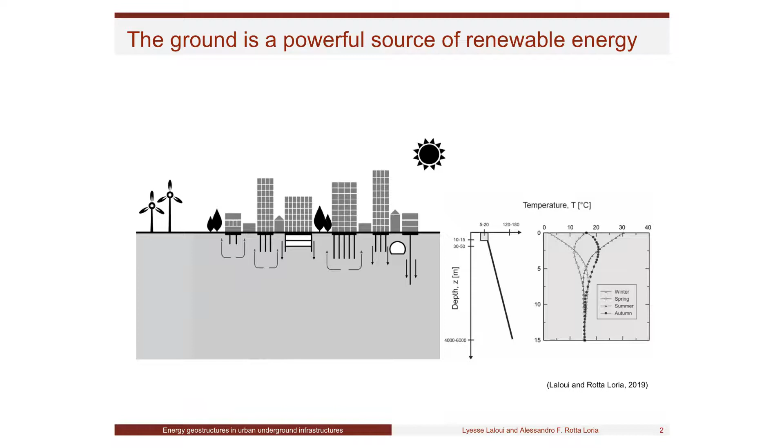The key point is the fact that almost all constructions we do have to be ground-based. We need foundations, tunnels for transportation, parkings, and other things. The key point in energy geostructure technology is the fact that if you look at the temperature distribution in the ground—this is a very fundamental point to understand what I'll say later on—except for the first part, let's say 2 to 5 meters, where the temperature can change during the seasons because it's affected by external temperature.

For instance, here you see various temperatures in the area of Lausanne, Switzerland, where in winter the ground at the surface is almost at 0 degrees. In summer we are almost at 30 degrees, and this is spring and autumn. But if you look starting from 5 meters depth, the temperature is almost constant. It's not changing anymore, and this is true until a depth of almost 100 meters.

After 100 meters, temperature starts growing again, and this is what you know as the geothermal gradient, where we grow more or less 3 degrees Celsius for each 100 meters.

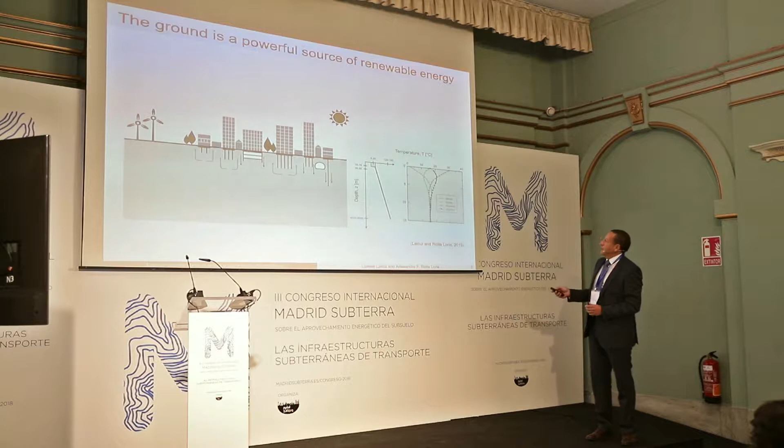So what we're interested in is using the fact that within 100 meters depth, temperature is constant all the time. This is a great advantage, because it means that if I take some of the heat we have in the atmosphere and put it in the ground, I can keep it there. Actually, the ground has poor thermal conductivity, and we're happy with that—the ground is a medium where we can store energy. So if I take some heat in the summer and put it in the ground, I can use that heat in the winter to heat my buildings or respond to other needs.

I can do the same in winter, taking some cold—meaning a temperature lower than the constant ground temperature. For instance, in this part of Europe, the temperature is constant between 11 to 13 degrees Celsius, depending on the place, all over the year. So if you put into the ground a temperature higher than 13 degrees, you can store it and use it later for heating. If you put in a temperature lower than 13 degrees, you can store it and use it for cooling.

So this is the basic concept. It's very easy to understand, very easy to handle, and it works.

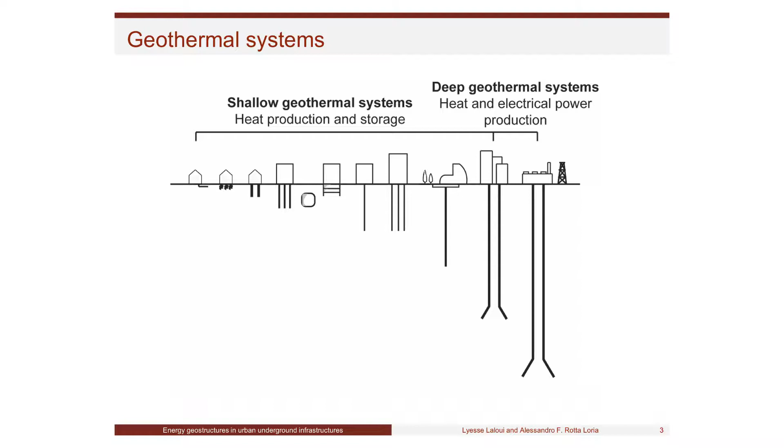When we talk about geothermal energy, I'd like to make it clear, because sometimes there's confusion about what we're talking about, since we put a lot of things in the same basket. Actually, we can produce electricity from geothermal energy, but this is rare, because to produce electricity you need ground temperatures higher than 130 to 140 degrees Celsius. To get those temperatures, you have just two possibilities: go very deep, sometimes 4 or 5 kilometers, or be in volcanic areas like Iceland, where you have such temperatures almost at the surface. So producing electricity from the ground is another topic of geothermal energy—it's not related to the geostructures we're talking about.

So what we're talking about in geostructures are rather shallow geothermal systems. You have to keep this in mind when we compare these things.

When we come to shallow geothermal systems, there are two families. There are those that are well known, the borehole heat exchangers. Borehole heat exchangers simply means you dig a hole to a given depth, usually 100 or 200 meters, where you find hot water, which you use to increase the heating of your construction. This is a different technology than the one I'll talk about, energy geostructures, where we are shallower and use the foundations or infrastructure for energy exchange.

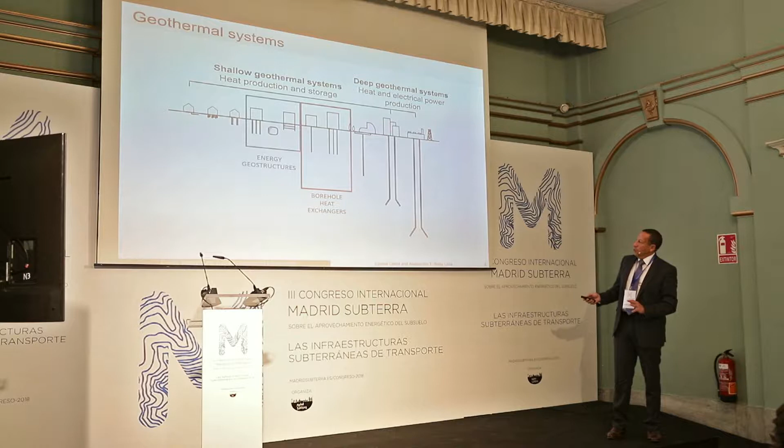So just to compare the two technologies clearly: on one side borehole heat exchangers, on the other side energy geostructures. When you use borehole heat exchangers, you need to dig holes, which means using a specific space for them, and you cannot use that space later for your construction.

If you use energy geostructures, you don't need any additional land, because you are simply using foundations that in any case you are constructing to sustain your building. Or if you construct a tunnel, in any case you need your tunnel - you're not doing it for energy. So this uses something needed for civil engineering and applies it for energy, whereas the other is just for energy.

Borehole heat exchangers allow you to heat, because you take temperature from the ground and use it for heating. Energy geostructures have the advantage of allowing you to heat and to cool - so if you need a cooling area, you can do it with this. Why is this possible? Because we store the energy. For instance, if we have cold in winter, we can store it, and in summer we can use it for cooling. With boreholes you cannot do this because you are just extracting. So with energy geostructures we can heat and cool - this is the second advantage.

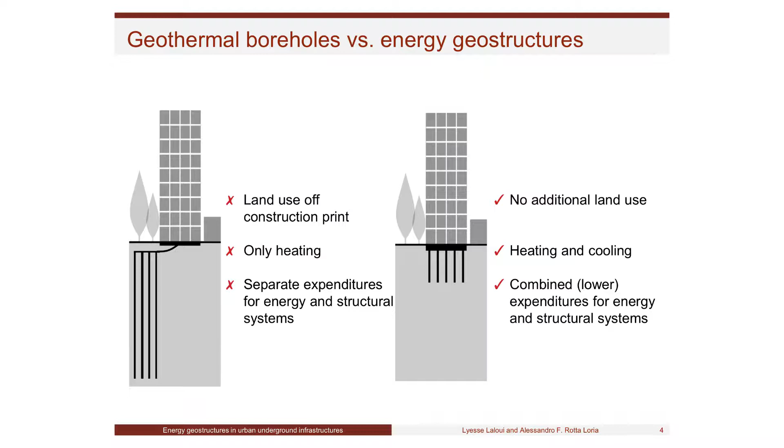This technology is related to constructions needed for civil engineering, while the other is completely separate from it. However, the two systems use the same concept: you can inject your 30-degree temperature from summer into the ground, and with respect to those 30 degrees Celsius, you may have a delta T of 15 degrees Celsius that you can use next time.

You can enhance the whole system by using a heat pump. Both systems use a heat pump, so actually the system is based on what we call a ground source heat pump. The ground source heat pump simply requires exchangers at three levels. For instance, we have the infrastructure underground, so in winter we can inject heat lower than the in-situ temperature, which is around 5 to 7 degrees.

We inject it lower than the temperature, and by circulating our fluid in the pipes placed in the infrastructure, we come back with some degrees higher because we stored some temperature in summer - or even without storing it, like in the example I'm showing, I'm simply using the ground temperature, which stays constant year-round at around 11-12 degrees Celsius. I come back with a temperature higher than this, and here I put my heat pump. I put this first circuit in contact with the second circuit, so the temperature induced in the system is higher than the ground temperature by 2-3 degrees Celsius, not more.

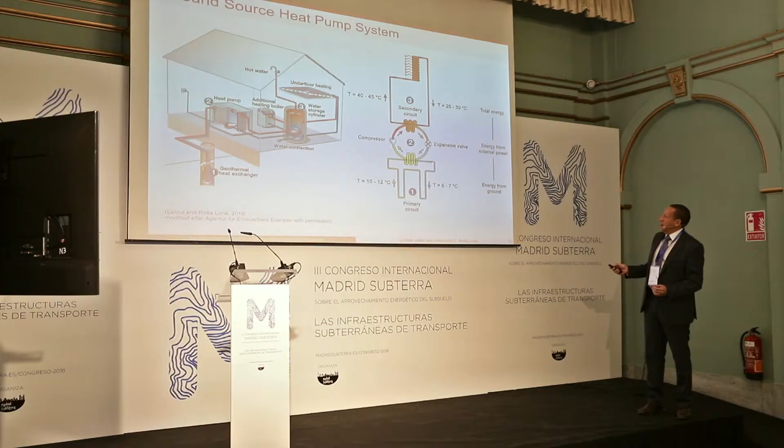Why am I asking this? Because to have this heat pump functioning, you need electricity. I don't know where this electricity is coming from, but we need electricity. So to say that the system is functioning favorably is when the ratio between the needed electricity, the needed energy for this electricity, with respect to the energy that we are getting here—this ratio we call COP, coefficient of performance. If this ratio is higher than 3 to 4, we have some projects where it's at 5, 6, but if it's higher than 3, the system is very favorable. So each time we have to check this coefficient of performance.

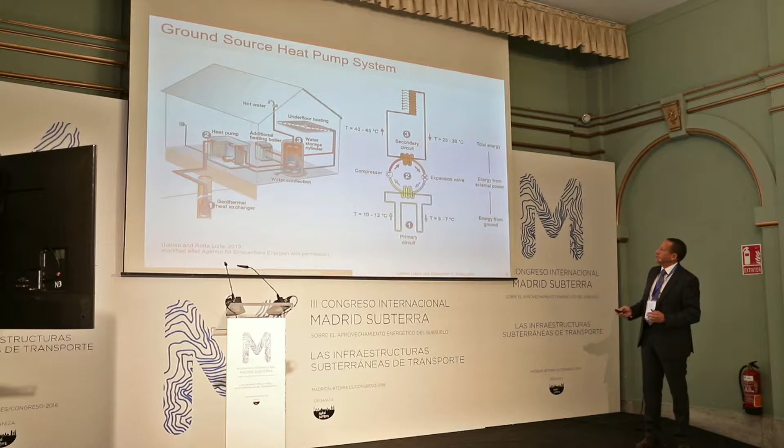In my company, we specialize in developing this system where the idea is simply to put heat exchangers in different kinds of infrastructures—in parkings, in tunnels, in railway tunnels, in foundations—and we can extract energy and we can store energy. What are the numbers that we have in various projects that we are dealing with?

If you go for piles, for instance, linear things, depending on the areas, we have something like 40 to 150 watt per meter of pile. So this gives you a number. You can already multiply. You take any project, you see how deep are each pile, number of piles, and you come to a value of energy.

In parkings, we use also the slabs. I will show you later on in some examples. We talk, as soon as we have area, not linear, we talk in square meter. So 20 to 40 watt per square meter in such concepts. In tunnels, we are a little bit higher, 20 to 60 watt per square meter.

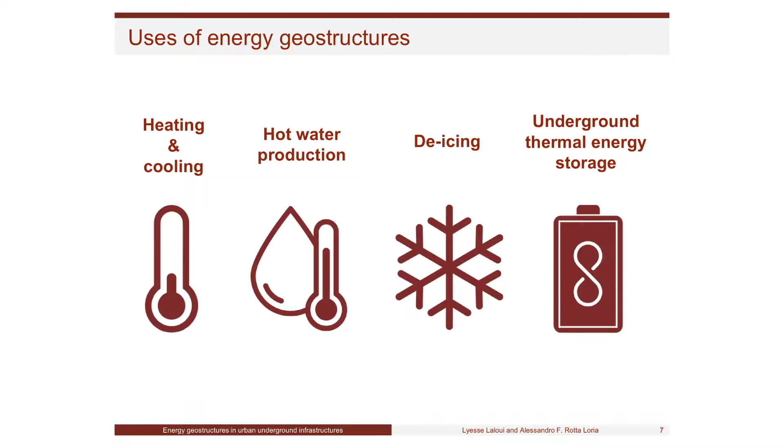So what do we do with this kind of heat? Actually, we have 4 main applications in the projects. We use it for heating and cooling, as I was mentioning before. But we use it also for hot water production, so you can produce it. We can use it for de-icing, because some amount of energy is enough to de-ice. And very important, we use it also for underground storage of energy.

So how do we use it also for underground storage? I mentioned before, by circulating this fluid, we get the energy that we have in the building. Just by circulating, we take the energy, the temperature that is, for instance, here in summer, and we put it in the ground. But we can combine it with other sources of energy.

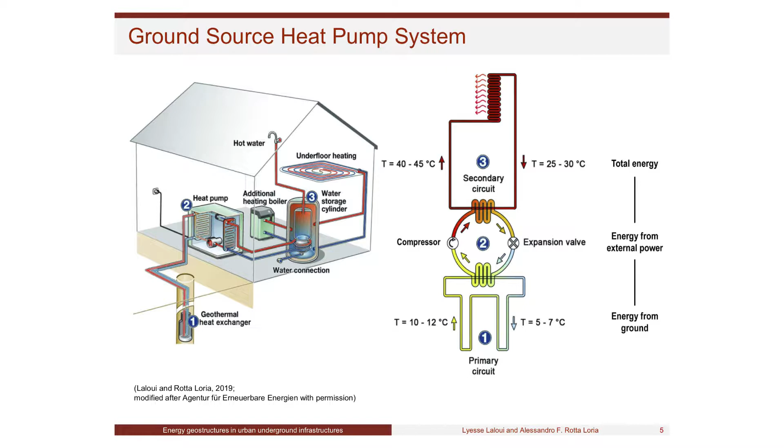If you think about solar panels, they are very efficient when the weather is nice, like this summer, during the day. In the evening, solar panels do not function, so they need a battery, they need to put their energy somewhere to use it later on. When we have a cloudy time in winter, solar panels are not efficient. So we can combine, and that's what we do, solar panels with the geostructures, with energy geostructures, to use the ground now as a thermal energy medium—so it's a battery. These are the 4 main applications that we are dealing with in this technology.

So why is it important to deal with those kind of applications? Why is it relevant? Here I'm showing you statistics—the European use of energy, how we use energy in Europe. A quarter of the energy in Europe is used for the building sector, a third for transportation, and a quarter for industry.

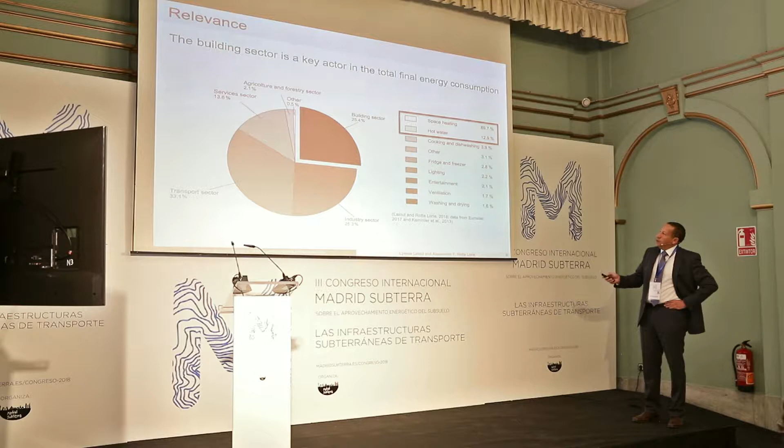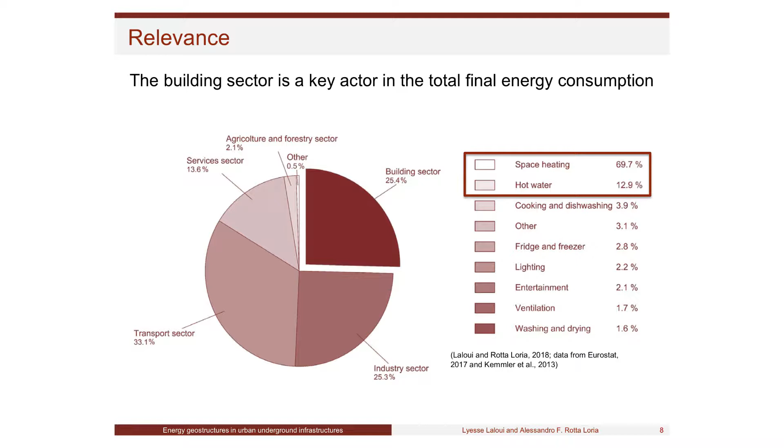And if we look at this building sector, which kind of energy are we using? 80% of the energy in the building sector is space heating or cooling and hot water. So when I mentioned we are dealing with those two kinds of applications, it means with those two applications, we are covering 80% of the need of any building in the European context.

So this is why it's relevant. We are in this global warming situation, and I think all of you are aware of the latest news from last week showing how bad the situation is. With energy geostructures, and we got several international recognitions for that, we are simply saving a huge amount of CO2 by using such technology.

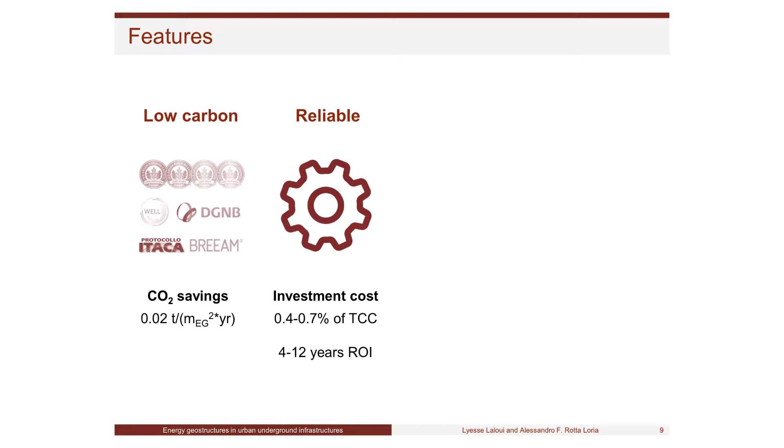We have to keep in mind the financial component. We should not try to develop technologies that are not financially sustainable. And actually with energy geostructures, it is almost free energy. The cost of it is almost nothing with respect to the cost of any infrastructure that we construct.

I'm giving you here a range of values. Let's say maximum could be 1% of the cost of any new infrastructure. We showed in our project, and this is why we do optimization for several projects, that the return on investment, if well optimized, could be already after 4 to 5 years. If not well optimized, it could be after 12 years maximum. After this, for 50 years, you have free energy. The only thing you need is the maintenance of your heat pump. Otherwise, the energy is completely free.

So it's not only renewable energy, but in addition to that, it's an energy that is very competitive in terms of cost with respect to other energies. It's a local energy, you don't need any transportation, so we are not counting here the transportation that we pay for other energies. In addition, it gives independency—you don't need to depend on what's happening in other places. If you import gas from Russia, and tomorrow there are political issues, you don't need that.

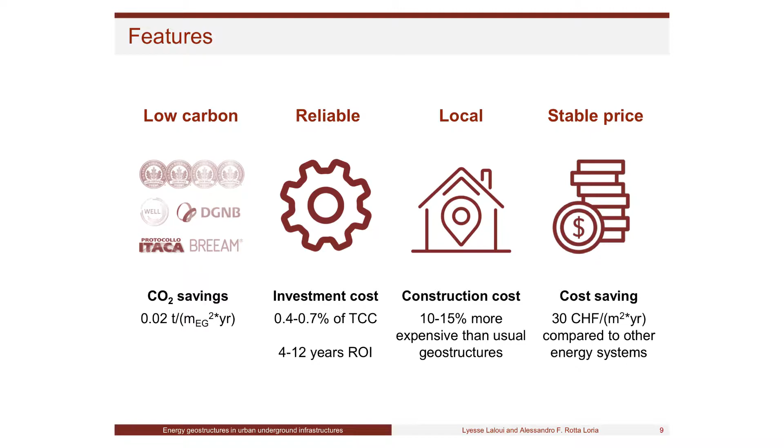Last point: cost saving compared to other energy systems. We did a broad analysis comparing it with conventional and unconventional kinds of energy, renewable and non-renewable, and it's really something very competitive—even cheaper compared to many other things. We estimate, in Swiss francs which is almost like euros, about 30 euros per square meter per year of saving in the cost of your energy.

They are plastic tubes. We circulate a fluid in them, the easiest way being water. It's a very easy system to put in place. You just put it close to your infrastructure, in contact with the ground, and then pour your concrete.

I call this an elementary concept, and I think it's very elementary. However, we have to take care about the design. It's not straightforward, the design is complex, and I will try to show you that. So it's not because it's easy to put in place that it's easy to design, analyze, and make it function correctly. We have to take care by not oversimplifying things. It remains a technology that needs some expertise.

So this is what we do in our company. We support architecture companies from the beginning in the conception, and in the way that we optimize where we have to put energy geostructure projects.

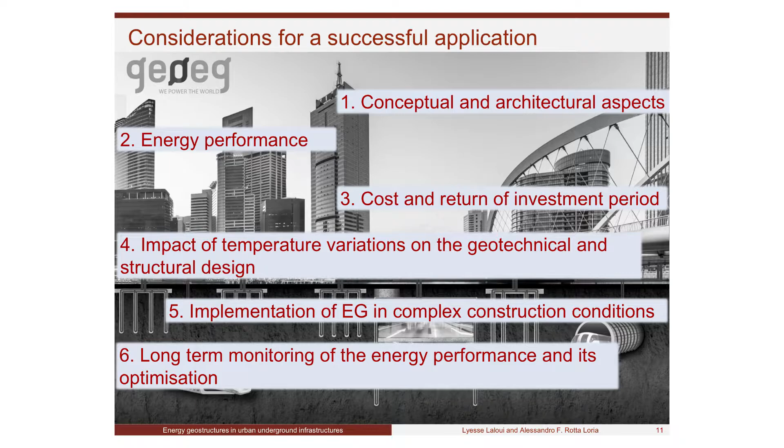A very important aspect that we usually don't do in civil engineering infrastructures is monitoring. Long-term monitoring of this infrastructure from an energy perspective is very important for optimization, because all the design we do at the beginning involves a lot of hypotheses about the way people will use energy in their building.

We consider that someone will need an average temperature of 22 degrees in the day, 18 degrees at night - this is in winter. We make a lot of hypotheses. But then when people are at home, they start opening the windows because it's too hot, instead of closing the radiator. So the users change things.

So by optimizing the way that people really use energy, by putting transducers in during the construction of the project, we get a lot of data that allows us to optimize the system and make it more performant later on. This is also something we have to consider in the analysis.

We have an energy aspect to design because of this energy dissipation happening through the exchange - first in the tubes, then dissipating into the structure. So we have a structural aspect to consider in the design, because the concrete is affected by the changed temperature, and then it goes to the ground. So we have a geotechnical aspect to consider too, because friction, for instance, is a key parameter for the strength of the foundation. So all three aspects - energy, structural, and geotechnical - are needed for the design of any energy geostructure.

So let me discuss some design considerations. Let's imagine here we have a station - this is a train station, for instance.

This is here the area where trains were circulating, where people were circulating. This is the ground, this is our walls. What do we have in the system to analyze from an energy perspective?

We have a fluid that is circulating in pipes, so this is the fluid mechanics. Then we will have the temperature exchange that is happening between the pipe and the concrete, so this is dissipation of energy in a porous material.

And then we have dissipation of energy from the concrete to the soil, which is dissipation of energy in a porous material with water and convection. So we have 4 typical materials: the heat carrier fluid, the pipes themselves, reinforced concrete, and the geomaterial, soil or rock.

We deal with heat transfer, but we also deal with mass transfer because we will control the flux here, what amount of water that we need to circulate in the tubes to have the needed amount of temperature. So we deal with mass and heat transfer, and mainly here we are dealing with energy conservation and mass conservation.

Then, when we are in infrastructures, there is a very important component that comes in, and it's very interesting for us, is the air. The air that we have inside the station will play a major role. I will show it in detail later on.

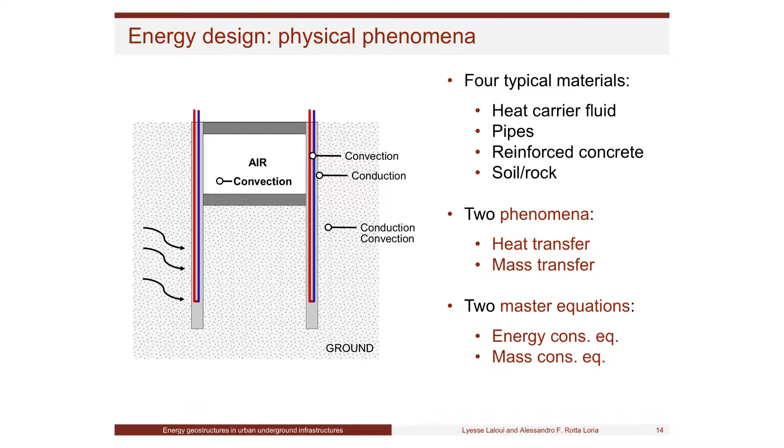So, coming back, we have convection in the tubes, conduction in the concrete, conduction in the ground, convection in the ground if we have groundwater flow, and convection in the infrastructure, in the area here. Those things should be mastered and controlled in such a way that allows you to design properly your infrastructure. So to do that, we simply use equations that are familiar for some of you.

I'm sure this is the heat dissipation by conduction. This is the heat capacity. This is thermal conduction, if you have to have dissipation in the concrete and in the soil or rock, in the ground.

However, in the tube, we have to have this exchange because we have a mass circulating, mass of water circulating, and there's a perpendicular component of the energy to the pipe that is important. So we have convection here of the fluid, and we have the generation of this fluid dissipation with temperature.

So we have to master those two phenomena. One is purely fluid mechanics in the tubes in non-isothermal conditions, and the other one is energy dissipation with convection and conduction. So they are the master equations and the elements that we have from an energy perspective.

And we can do that, obviously often we have to do it in 3D conditions, and this is what we call thermohydraulic conditions. So we are combining the energy, so the thermal aspect, with hydraulic. And then we have the mechanics.

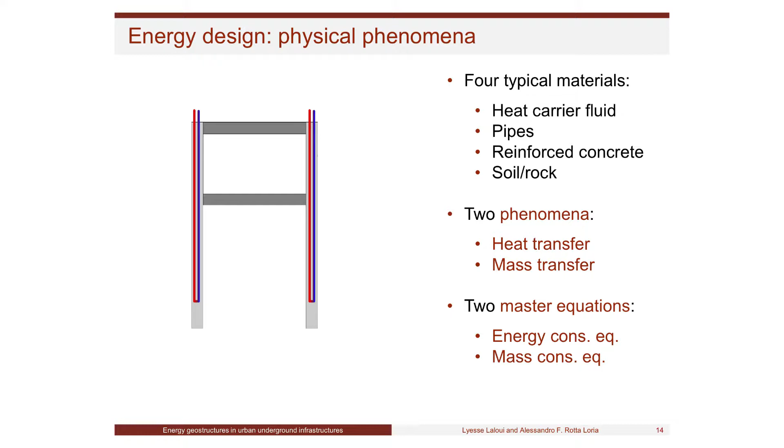So in the design that was done of our infrastructure, everything was considered without considering the temperature change. So we have 2 effects that we have to consider. The first one is frictional, in the sense that I will show you in detail, that the friction or

the mobilization of strength will be affected by change of temperature. And this we have to control and to know. And then we have bending moment that will be generated in the sense that temperatures will be different in different points, so the deformation will be different, so the moment will be different. So this is what we will see in the next slide.

So we will have strain variation and stress variations that we have to compute, and of course we are dealing with equilibrium. So basically we have now to design our infrastructure to conditions that were not originally meant for it. In conventional design, we do it like this, to have it there.

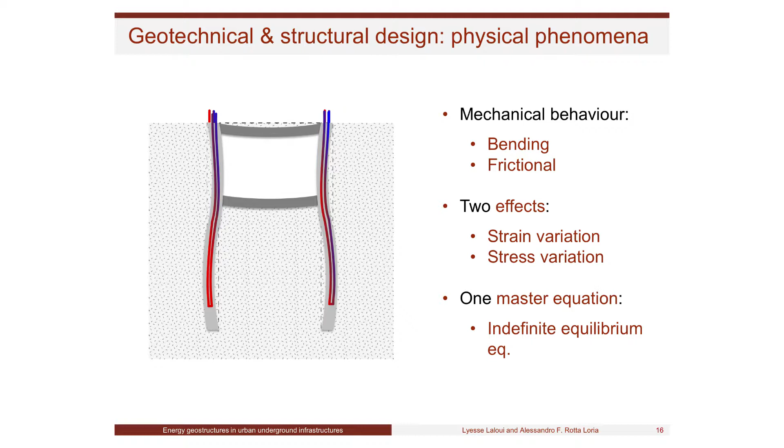As soon as you have temperature change, any body that you put in contact with a change in temperature will deform. So then you have to deal with the deformation, or you do not allow deformation, you constrain it, so you generate stress, thermal stress, that you have to add to your static design.

So the two things, and actually with energy geostructures, we are not in any of those two extreme conditions. We have a part of deformation that will happen no matter if we would like it or not. It will happen, and we have to master it and control it. And we have a part of deformation that will not be able to happen due to the rigidity of the ground and the system. Then this will transform into additional stresses that we call thermal stresses that we have to add in our geotechnical and structural design.

So to do that, we have to combine our energy equations that I showed you before with the mechanical ones, where we have to add the thermal deformation. Here I'm just putting the thermoelastic deformation, but the thermoplasticity could be in the constitutive equation. This gives us the stress we are getting. So we have to redesign and recheck our structure due to this change of temperature, but this is the work of experts, so there is nothing special in it.

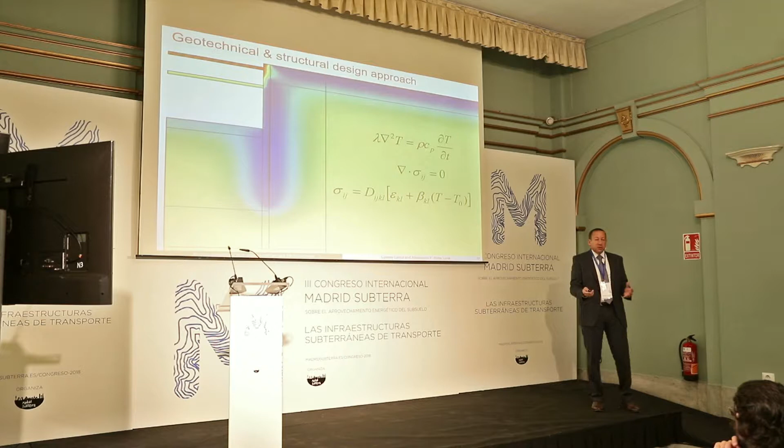I will now show you two examples. First I will discuss a project that we had on energy walls, and then a project that we had on energy tunnels. So two examples of infrastructures.

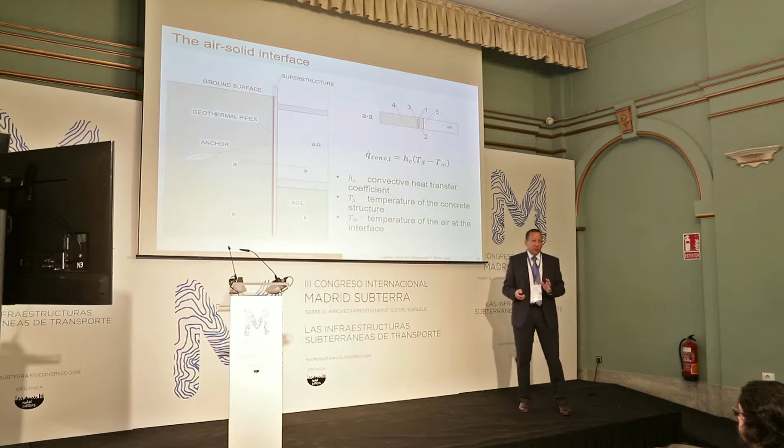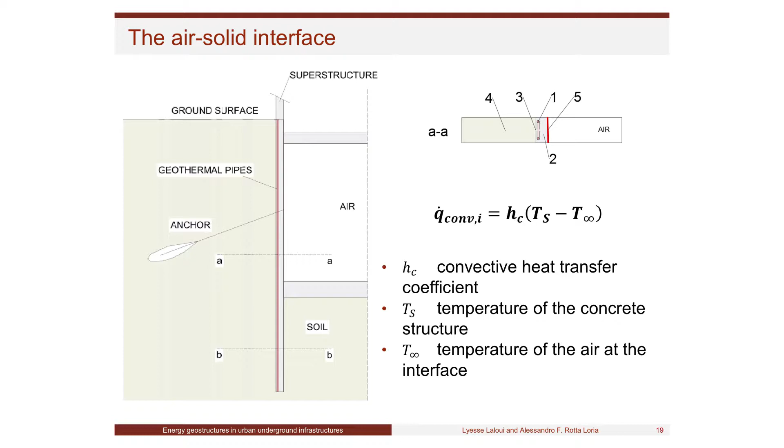There are two ways to design an energy system. Either you say, I would like this delta T, this variation of temperature, to be constant all the time, so you put delta T, for instance, 3 degrees Celsius, and you control it on your heat pump with a constant temperature setting. The heat pump will manage the needed flux so that you get an all-time constant temperature. The other way around is to have constant flux: you inject all the time the same hydraulic flux in the tubes, no matter what temperature you get. In this case, we control it.

This part is coming from the potential of your infrastructure, the potential of your concrete, the potential of your ground to give you energy. You will see the air in the tunnel also plays a huge role in this system, which helps in managing things.

So basically, keep in mind that we have a simple linear equation, but this coefficient is not constant. This is a very important point in all design. This coefficient depends on plenty of parameters that I will show you later.

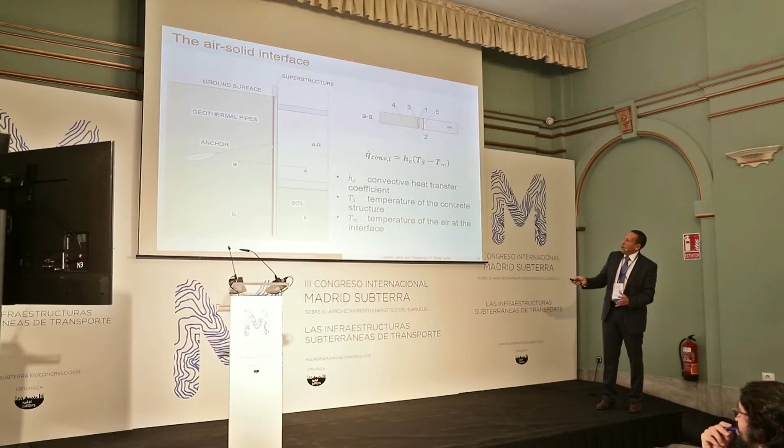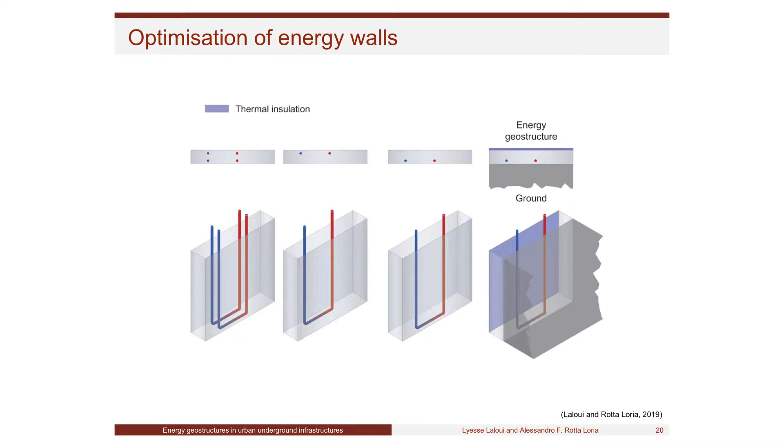When we have to design such energy walls, here I showed you a cross-section where the pipes are placed close to the ground. But actually this is not always the case, so we have to look at different configurations. There are different possibilities depending on the energy capabilities of the soil or rock, and depending on the groundwater flow. Depending on that, you can optimize your system to get the energy you would like. For instance, here it's a double U system: one pipe close to the ground, one close to the tunnel. This is one option for the station.

Another option is to put only one close to the ground, or only one close to the station. Another system makes it impermeable from an energy perspective in one of the two areas—you don't want energy exchange on one of the two sides. We did this, for instance, in the London metro station, where on one side you don't want the exchange. This is also something that's possible.

So there is an optimization of those energy walls that should be done to get the best energy that you can extract, but also while looking at the cost of it.

Of course, as soon as you decide where to put your tubes—for instance, if you decide to put them close to the station, which we often do—then we look at shapes. Different shapes give different amounts of energy. There's a small cost difference in terms of length, but there's also an operational consideration in how to place them on site without delaying construction.

The idea here is that each time we put a panel—those panels are more or less 3-meter length panels—we would like to do it in 15 minutes, otherwise we delay the construction on site too much. So we have to be efficient in the way we do this. Then we try to attach those tubes to those panels.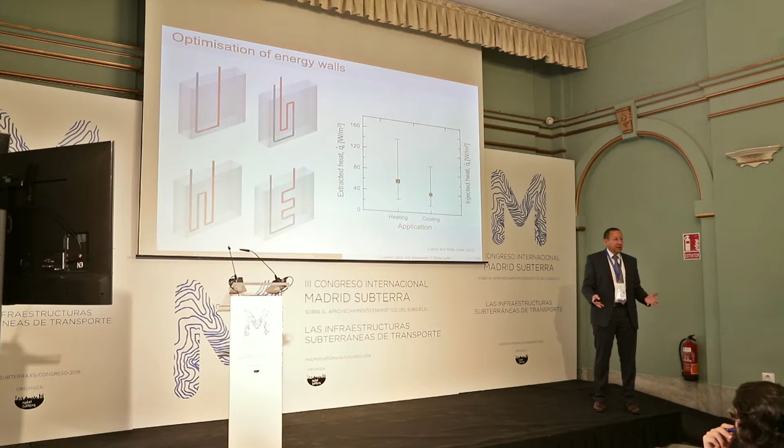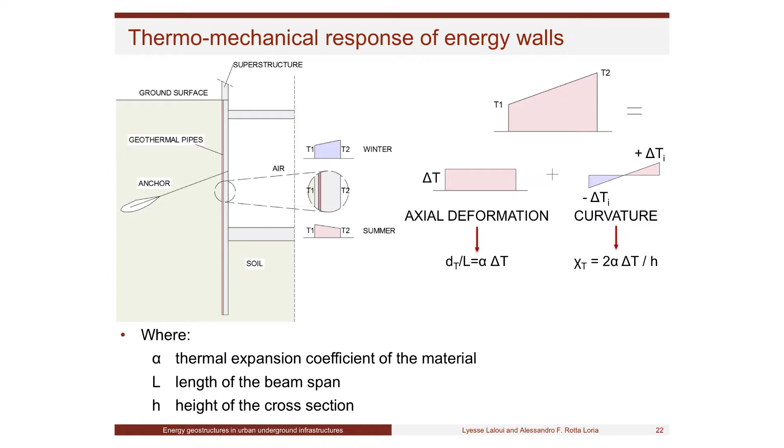From a structural perspective, as I was mentioning, we have the fact that temperature is different from this side of the wall to the other side. This side will have a given temperature that is different from the other one. So if you multiply each of those temperatures by the same alpha, the same thermal dilation coefficient, you will get different deformations.

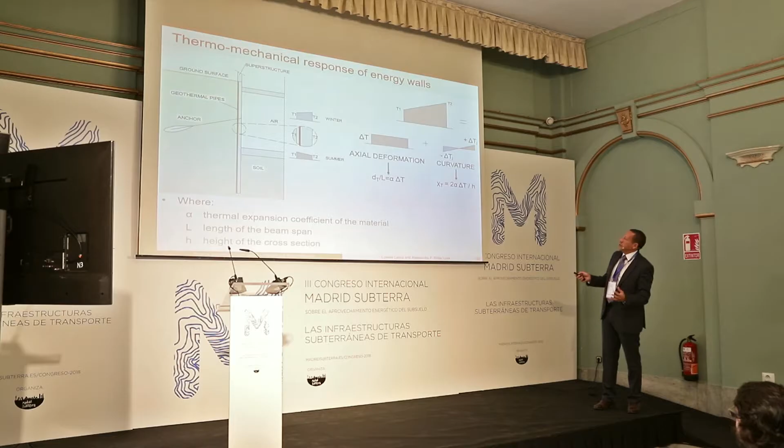So we split this into two parts. One is uniform deformation, because here we have uniform temperature, so we have entire deformation of our system in a uniform way. But this deformation doesn't just go in one direction, because there's a trick when you heat a body: if you heat this stuff, it will deform from both sides. It will not deform entirely this way, it will deform on both sides, and there is a neutral point in the middle that will not deform.

So then if you put it in the ground, you have some constraints, some friction. There is what we call the null point, the point that is not deforming, which will change place depending on those conditions. You should identify this null point from the beginning to optimize your design, because part of the structure will go up, another part will go down, and there is one point somewhere, depending on the rigidities and connections, that will not move at all. So those things you have to determine.

And then the part of the temperature change that is not uniform creates your curvature. So this creates the moment that you have to add in your design.

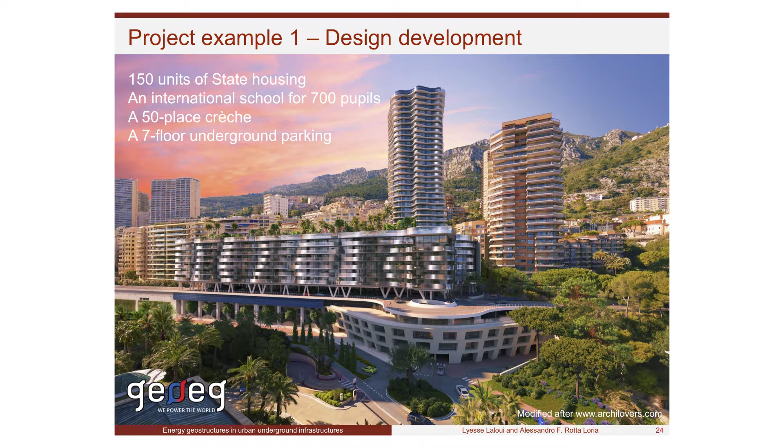So let me give you some examples that we are dealing with in the company on energy walls. I started with energy walls. This is a project that we started last year. We are in Monaco, and there is this tower that has to have a given amount of energy. The requirement was 230 kilowatts per year for this.

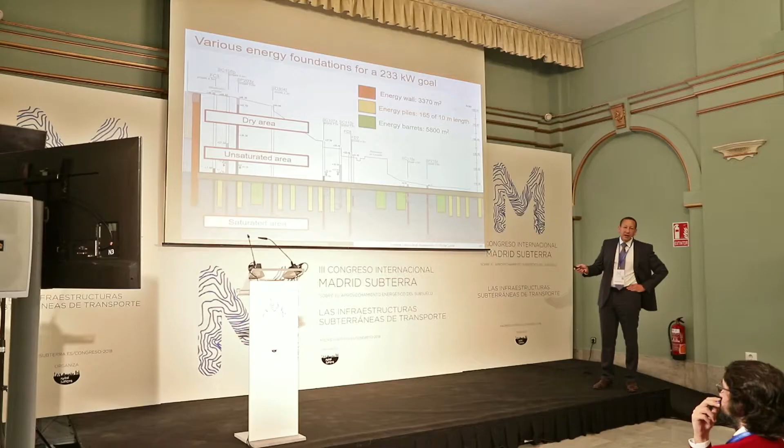But what I will show you mainly is that underneath, we have this part that is a parking structure, 7 levels. In this project, limiting myself to the walls, we have those 7 levels of parking, and we have an international school also here. It will be the International School of Monaco.

The saturation conditions are not uniformly distributed. We have a dry area at the top, an unsaturated area here, and then a saturated one. When the material is partially saturated, the thermal conductivity and heat capacity decrease, because they depend on the degree of saturation, so we have to consider this in the analysis. Here you see the piles and the barrette.

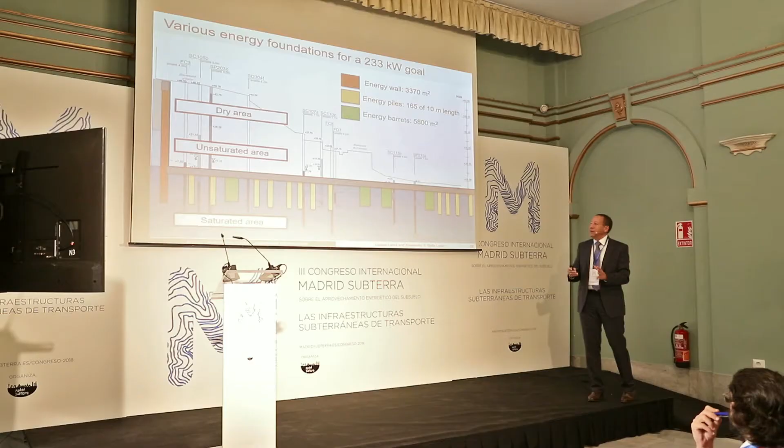What we did was to achieve the goal set by the owner of the building. He asked us to provide this amount of energy, not less, but not necessarily more, because to get this, he received a reduction on taxes, since the building is considered later as a green building from a given perspective. So the building will pay less taxes.

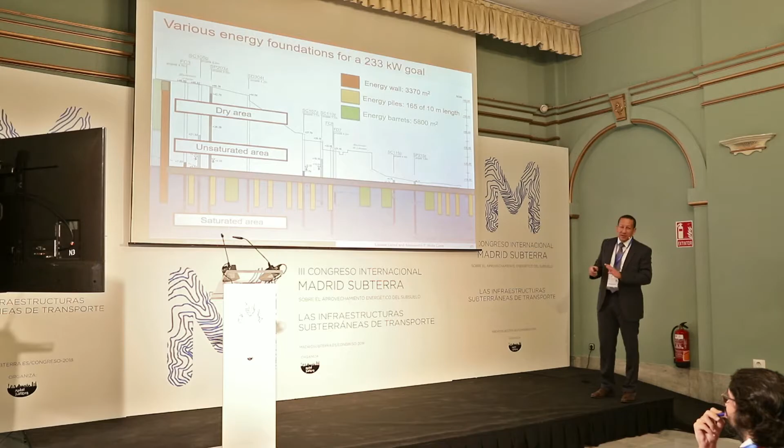So we equipped energy walls. We equipped more than 3,000 square meters here of energy walls. We had 165 piles in the entire construction, and we equipped all of them, but we did it with the same length for all of them. We used just a 10-meter length. It was enough, and we also had those barrettes.

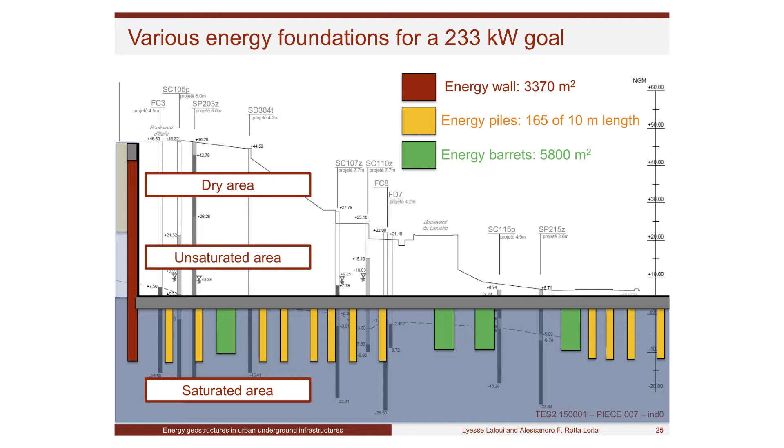They are big piles, actually. We equipped 5,800 square meters. With those conditions here of saturation and water flow, we are close to the sea. Actually, the sea is just here, at less than 500 meters, so we have water flowing underneath. We were able to provide this amount of energy.

This is another example, a project we are working on currently. This is in Seoul, in Korea. We are downtown, in the city center. Here we are designing this infrastructure that will be entirely equipped with energy geostructure.

But we have various options, I will show you later on. This is 1 kilometer in length. Here we have a conference center, there is a mall here, and there is a station here, an underground station. Actually, there are 2 levels. There is an underground station and train station in the same place. You will see it in the next slide.

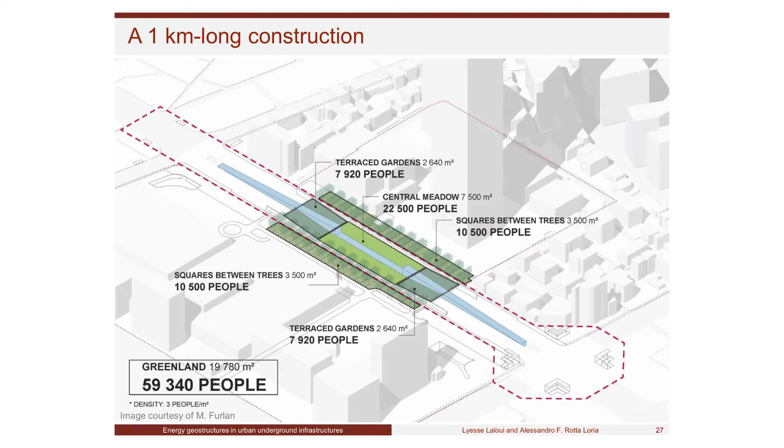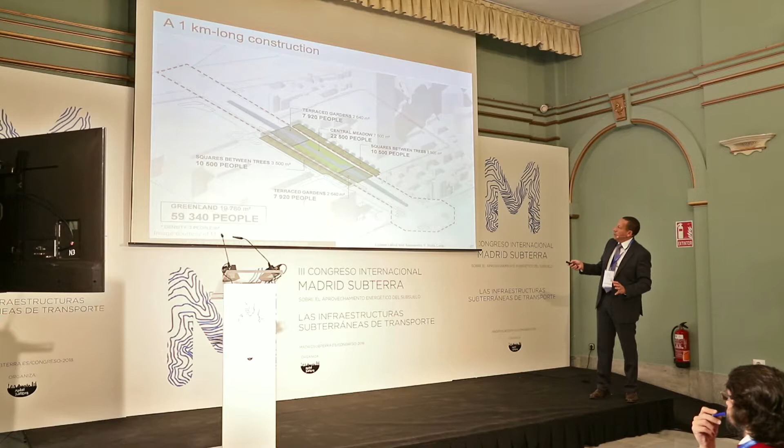So this is how it looks like, this is our 1 kilometer project. It's entirely in glass to have natural lighting coming from outside. The idea is that we will have around 8,000 people in this part daily, 22,000 in this part, and 10,000 in this one. And then we can add to them. So altogether, we have to provide almost constant temperature over all the year for 60,000 people. This is the challenge we are dealing with, and we are happy to deal with because we showed that it's feasible, and I will show you this.

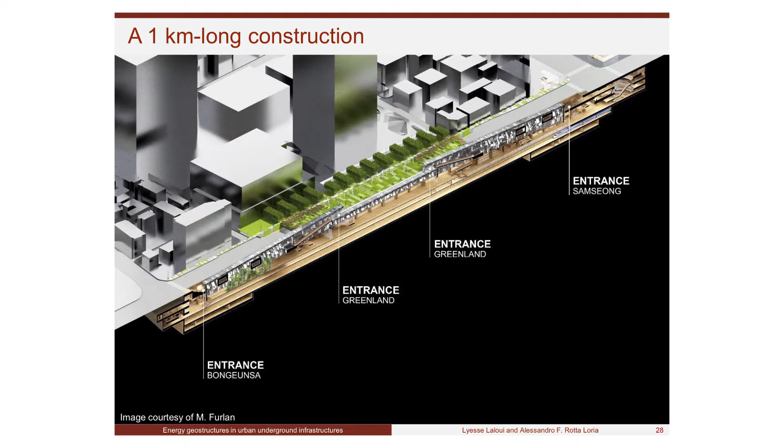So this is a cross-section of our project. You will see it later on because we have different entrances, and you have this part that I will show you that is completely in glass. The idea was also to avoid having snow on it, because if we have snow on this glass, then the lighting will decrease. So the idea is to avoid having snow.

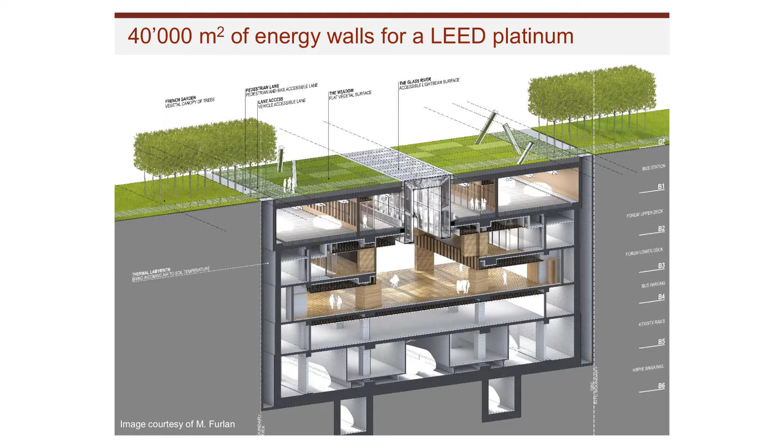So this is a cross section, this is the part with the glass, as I was mentioning. Here we have buses and cars running, so we have this air exchange that we are looking for, and I will show it more when we show the tunnels later, this coefficient. We have people running here. Here we have the trains, and we have the metro here.

So what we did in this project, we created what we call a thermal labyrinth. This is our project, how we solved it. This is our light beam, as I mentioned. Here we put also energy exchangers, so all those points that you see are energy exchangers. Here for de-icing, I mentioned before that we can do de-icing, so we did it here. Otherwise, here we have piles, and the entire piles are equipped for energy exchange.

We left some space here for air circulation. Here we have slabs, a part of the slabs we are using for cooling, part of them we are using for heating. This system is not a conventional way of doing things where you say I'm heating my house or building and cooling it. Here, the idea is to keep constant temperature all over the year, no matter what the temperatures are outside.

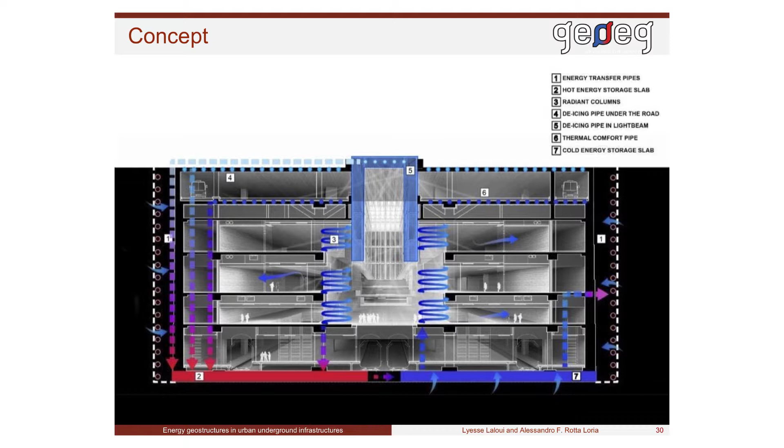So in Seoul, they could be very cold and very hot. So we create all this labyrinth with air circulating, allowing constant temperature, and all the energy is coming from geostructures, from infrastructure and geostructures. So there is no other kind of energy in the project, and this allows the entire temperature to stay constant over the year. I will not go into details because we did several scenarios for this, and depending on scenarios we did different things, because there is financial optimization, the system we had to do to convince the client that this is the best solution.

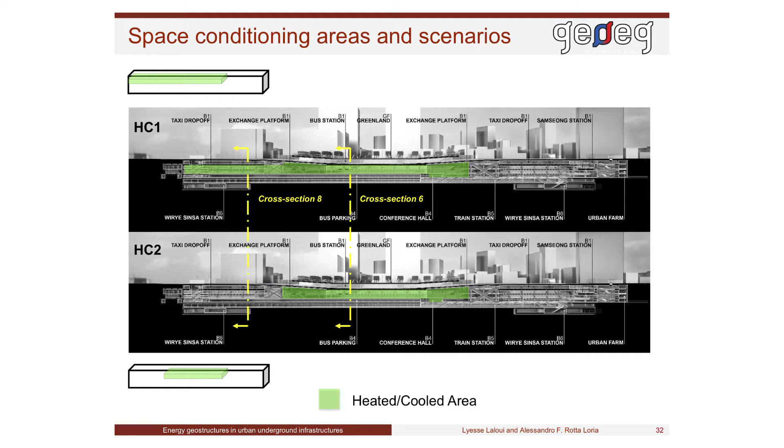So in the end, this is the final construction, how it is. We did not equip the entire system because it was enough. Actually, I will show you next slide, we had enough energy for getting constant temperature from the entire 1 kilometer just by having this part, the green one that you see here, was enough for us. So this is the final design we did for the project. Here we use this part for cooling, here our energy walls, energy slabs. We also used this exchange of energy coming from the air, from those.

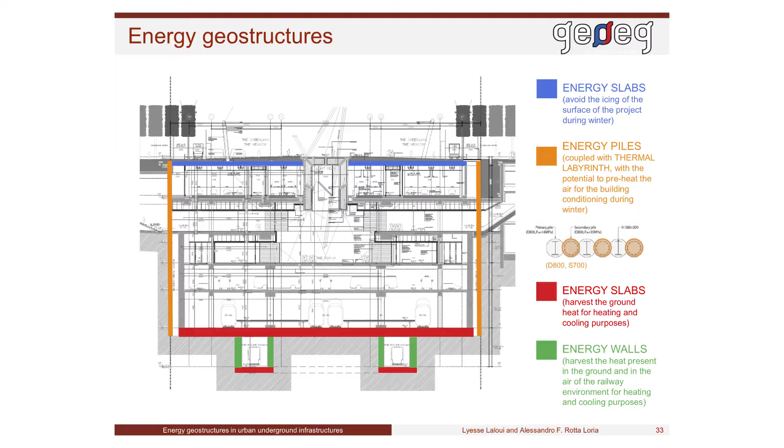This is railway tunnel, this is train tunnel, and this is the metro line. Here you see the numbers that we developed and the things that we developed. This allowed us to get an award, Platinum LEED recognition, for the solution.

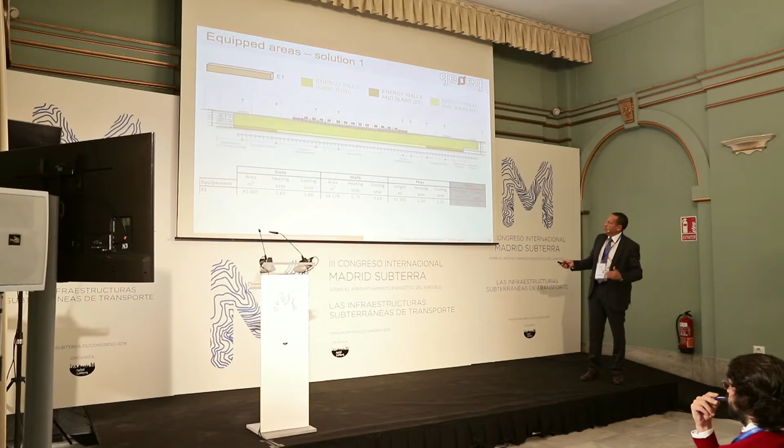So this is the final solution that we are getting, and these are the numbers that may be of interest. We are getting, for heating, more than 4 megawatt for the project, cooling 3.5 megawatt, by equipping something like 45,000 square meters of walls and piles with tubes. This is basically the project you see: we have the slabs I showed you at the bottom and at the top, we have the walls, because we are interested in the walls in this part, and we have the piles.

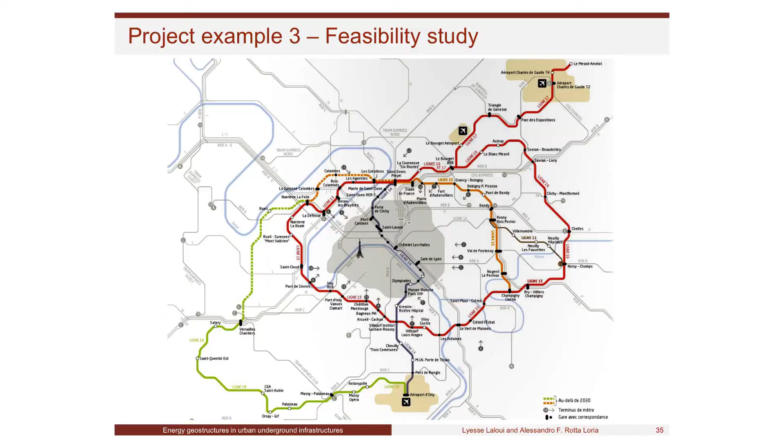Another example of energy walls. I was involved in the project which we call Grand Paris. In Paris they are constructing 3 new metro lines. Initially they were meant for the Olympic Games 2024. Now, for budget restriction, they decided last summer, one year ago, to extend the construction until 2030. So not all of them will be ready for 2024, but they maintain them. The 3 new metro lines include an extension of line number 14, which currently stops at the library François Mitterrand and will go to the airport of Orly, and lines 16, 17, and 15. In those metro lines we analyzed initially 16 stations, and I will come back to that later, 16 stations to be equipped just on line 16. I will show you some examples with just some numbers to highlight the things.

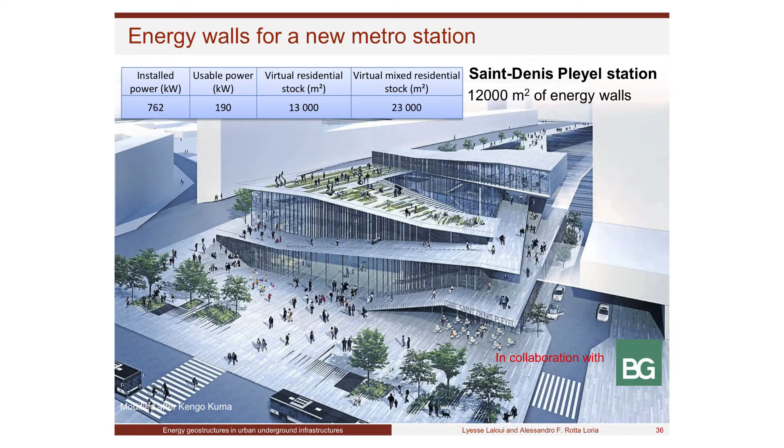This is a large station, Saint-Denis-Pleyel. Saint-Denis-Pleyel is somewhere, it's here. It's a large station because it's a connection of 3 metro stations. There you see the power that could be obtained is almost 800 kilowatts, and there is almost 200 that is not used. The point here is that those stations do not need energy; they are stable from a heating and cooling perspective. So the point now is to sell this energy to the surrounding area. We know that until 500, 600 meters surrounding the place it's possible to provide energy.

The idea is that, because those new stations are being constructed in areas where there is nobody living today, they will expand Paris to the north with those stations. So the idea now is to provide this amount, 13,000 square meters of construction surrounding it, going until 23,000 square meters of residential blocks that will be constructed later on, to connect them and provide them with the fact that we could equip 12,000 square meters of energy walls. So we'll go a little bit faster. Of course we did numerical analysis for the optimization, as we did before, with those finite element codes that we developed with all the equations, to optimize the system.

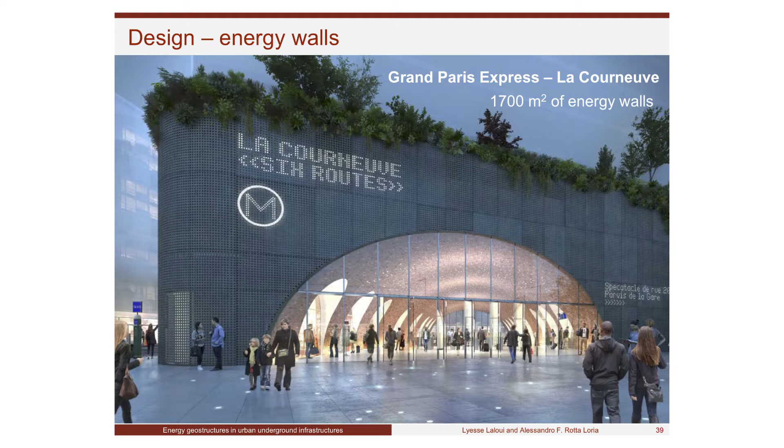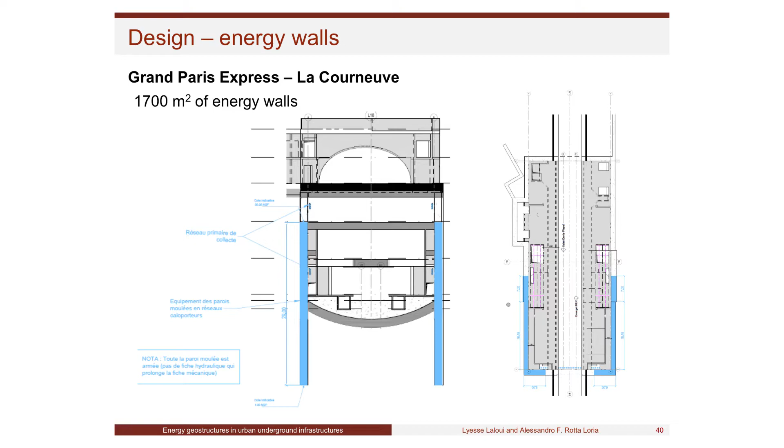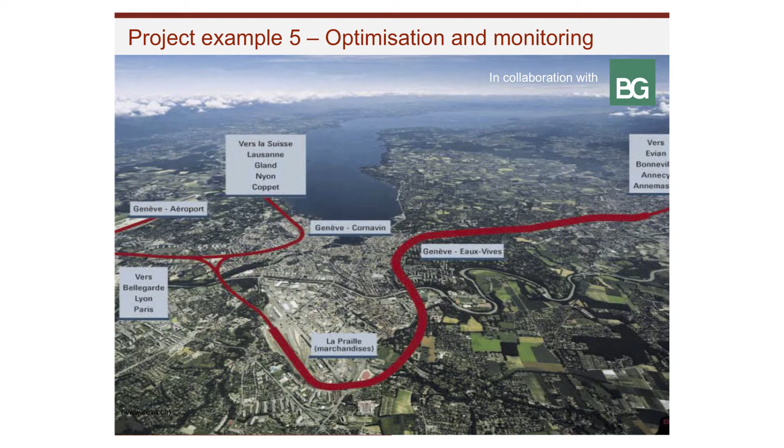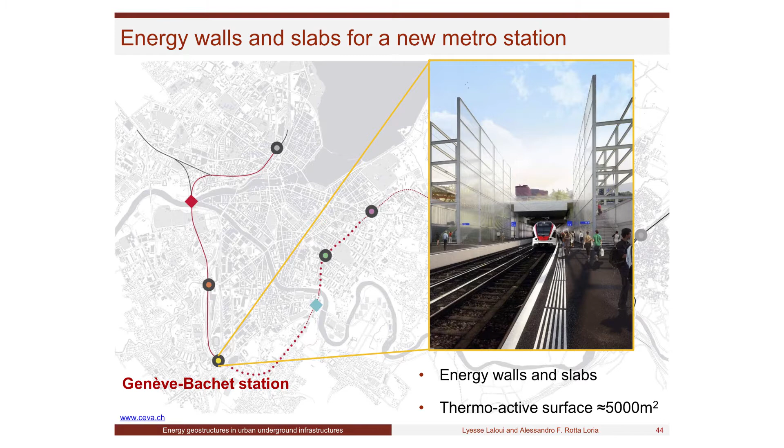Last example of walls, this is a project we are having in Switzerland. This is Geneva Airport here, this is Geneva City, this is a new metro line. It's at the end of construction; some stations are already open, connecting Geneva to France, to Evian. I will show you an example of an energy station: this is Genève-Bachet station. You see it here, it's equipped with these energy geostructures.

Now we are at the stage where construction is finished and calculation is done. Now we are at the stage of optimization. The owner of the station, which is the electricity company of Geneva, had some calculations and so on. Now they would like to ensure what is the amount of energy that they will sell from the station. They will start selling the energy in 2019, end of next year. So of course we did all the calculation and design. During the design we considered that slabs and walls give between 10 and 20 watts per square meter. Currently we are moving to the real conditions in the sense that we are off.

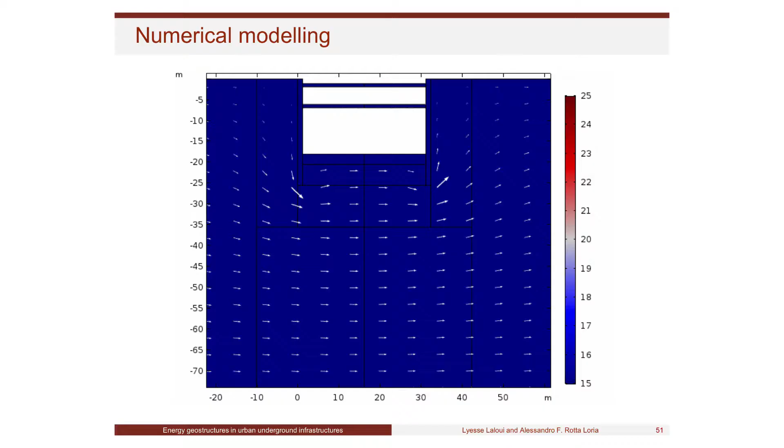As I mentioned, we are currently at another stage, a stage of optimization on site. Construction is finished, transducers are there, and so on. So we are doing what we call a thermal response test.

Thermal response test is very conventional for piles, but when we come to structures like this, you cannot use the conventional thermal response test, because the linear source equation that we used to use does not apply in these conditions. And here we have the entire condition.

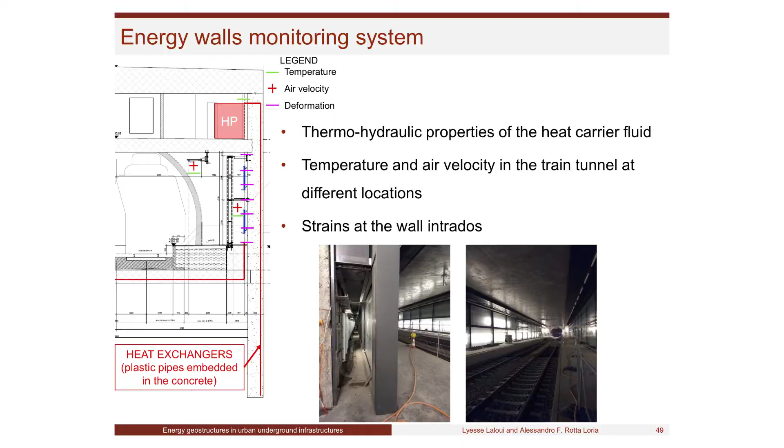So the idea is to equip the station during 1.5 years with those transducers that we put there, that you see here. We put temperature transducers, air velocity, deformation.

This is the station now. These pictures were taken last week. And here is this glass wall, and we have here 70 centimeters where we are putting all our equipment on the wall. We already have the pipes there and so on.

And the idea is that during 1.5 years we will optimize the system and give a response to the electricity company on really how much they can rely on it in winter and in summer, because their job is to sell this energy. So for the last 5 minutes, I will show something about tunnels.

Tunnels are different than energy walls. Of course, we have this air that plays a role. Also we have the ground, but the exchangers are put in, and there are two kinds of tunnels, two kinds of ways to put the tunnels.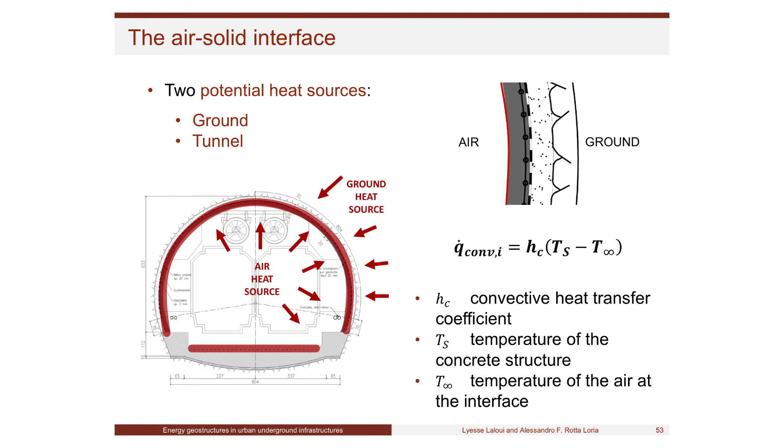In any case, the equation that we use remains the same. Nothing changed. The energy could come either from the ground, as we saw before, but also from the tunnel itself.

So we have to combine those two sources of energy, and actually this coefficient H is not constant, in the sense that it depends on the velocity of the air and the hydraulic velocity. So we have a thermal development in the tunnel, and a hydraulic development of the air in the tunnel, and those two are not designed the same way.

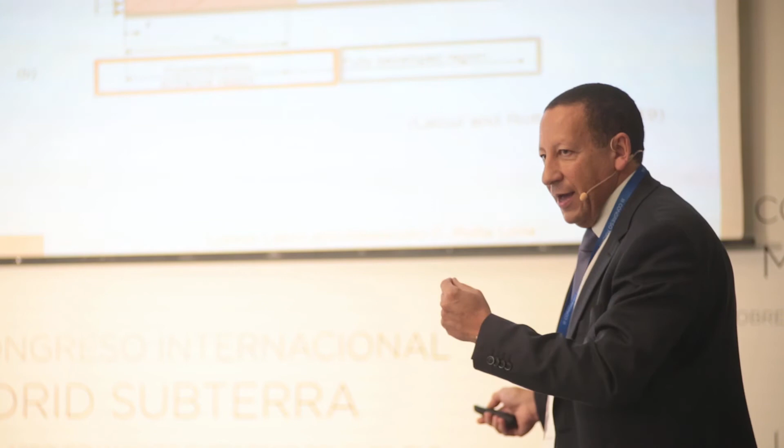The idea is that we get more energy when we are in the fully developed region, when the system is in a kind of steady state condition, there we get the maximum energy. As soon as we have to change the trajectory of the tunnel, then we are in what we call the entrance region, and the energy on one side and the hydraulics of the air in the tunnel are more affected by the frictional conditions. This is why even the concrete you put, the roughness of the concrete you put in the tunnel, plays a role on this coefficient H I was showing before.

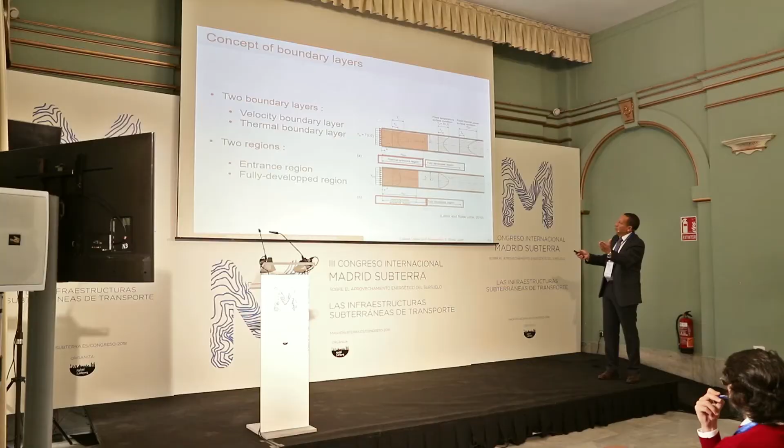We've shown in different projects that the way you put your concrete, your shotcrete for instance, in the tunnel, plays a role on the amount of energy you can get. So we have to design things depending on the trajectory of the tunnel, whether it's in this entrance region, and as I said, the thermal one is different than the hydraulic one. Hydraulic is the air convection.

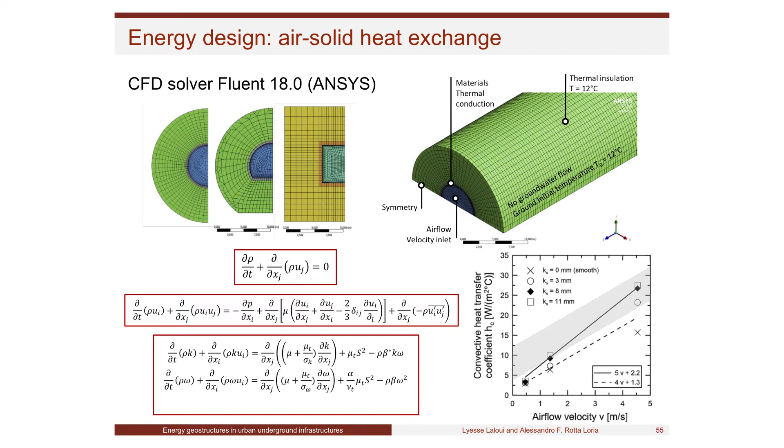To do that, we use codes that are in the market, actually. It's a fluid mechanic problem on one side, air diffusion, energy diffusion, that we combine with other codes dealing with structure and with hydraulics.

And we show that this coefficient H we saw before is not constant. For instance, it depends on the air velocity, depending on whether your trains are running fast, if it's a fast train station or a metro station, depending on the number of stops of the train, how it's decreasing the velocity.

We consider also that this coefficient is different in night and day. For instance, in a metro station during the day, you may have a lot of fluxes, so there are a lot of trains. During the evening, you will have less. In the night, you have almost nothing.

So this coefficient, we change it almost every 5 to 10 minutes when we have to optimize our design of the infrastructure, so then we can run calculations and so on. So this is very important.

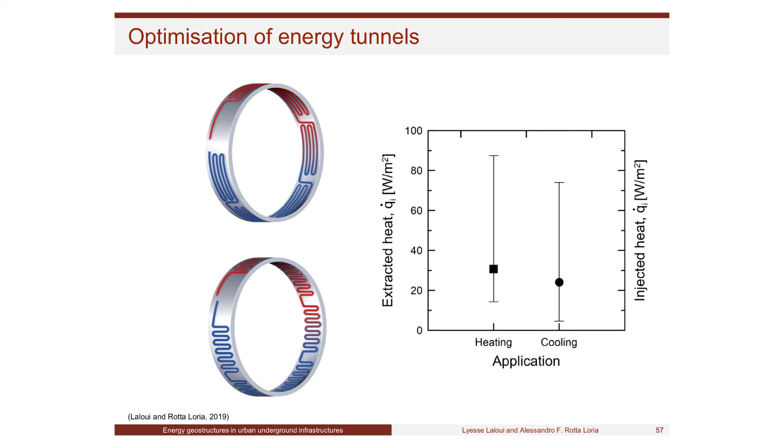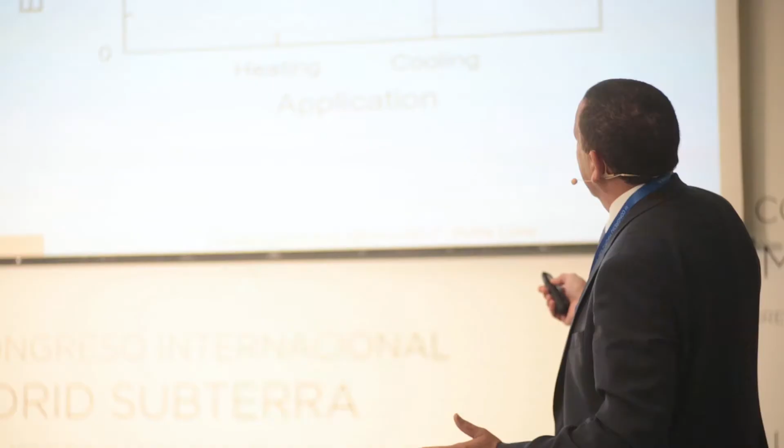And we show that the way that we put our tubes has importance on the amount of energy that we can extract. We can see here we can extract almost 4 times more depending on the way that we put our tubes. And we apply this technology to a Grand Paris Metro project, to a tunnel that is here in the station that's called Chelles.

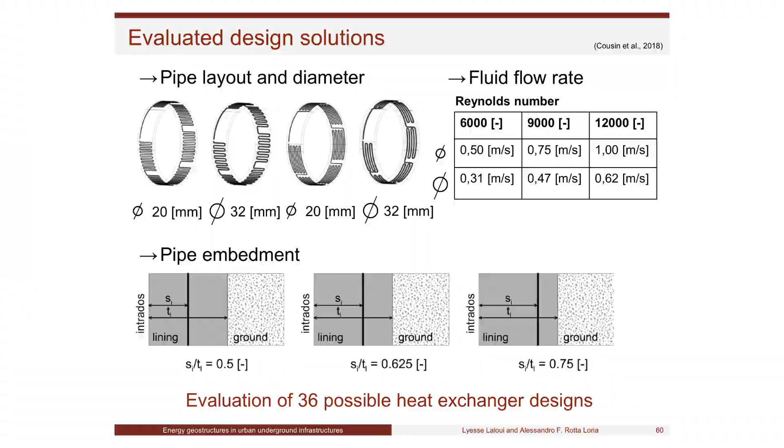So on the market you can find 2 kinds of tubes, 2 kinds of diameters, 20 millimeters or 32. So we consider 2 of them, and we consider different positions of our tube with respect to the ground or the intrados. So we have different distances, and we considered different velocities of the fluid, the water, in the tubes. So this is Reynolds number.

So we are all-time turbulent because turbulent flow is more efficient for energy exchange. But depending on this, we optimized the way to allow us to extract the maximum energy from the system.

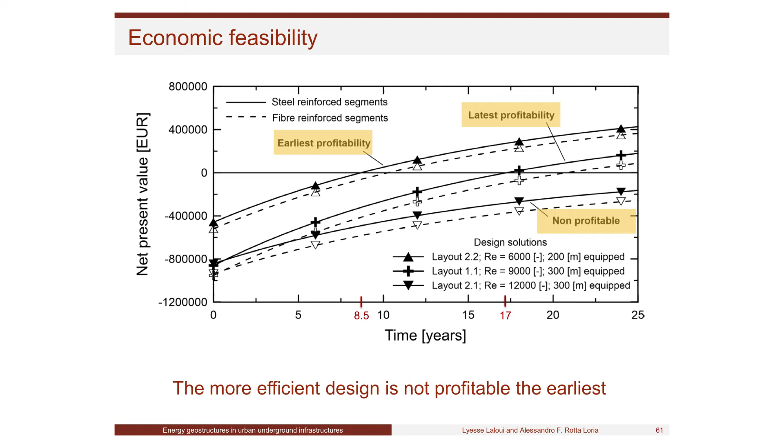And from this, we related it to the financial aspect to say, in euros, because it was in France, what are the configurations that allow us to be profitable? This is on the top.

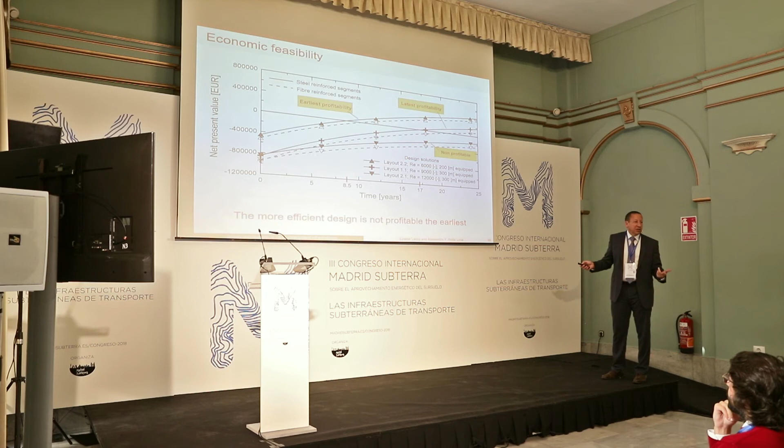But there are even configurations where you can have projects where you put energy geostructures, but you are never profitable. You never recover your money if you don't do your design correctly. You see one of the configurations here, you see 2 of them. Even if we equip them, we have energy exchange and so on, but financially we cannot recover. So here you see that you can have those who can recover, those who cannot recover. So such analysis is absolutely needed.

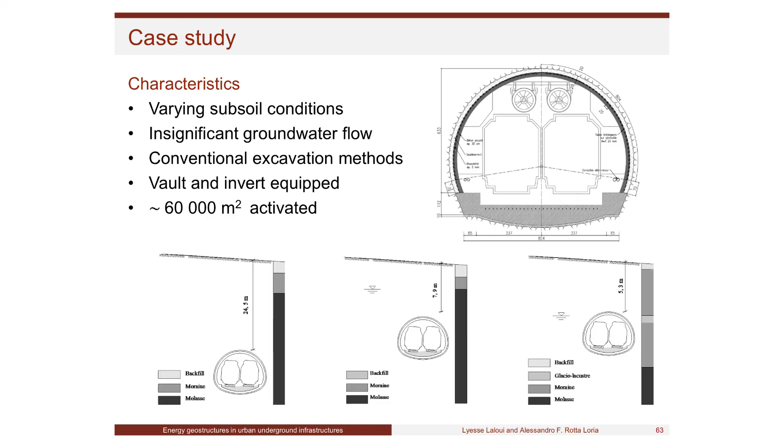Actually, the metro line is going at different depths with different hydrology. So in one case, for instance, we don't have water at all, we are at a depth of 25 meters. Other cases, we have a water table at this level, others at this level. So in all conditions, this part was a little bit shallow.

We have to analyze all things, and we are proposing to equip 60,000 square meters of this tunnel. So you see we equip the part here and the slabs also.

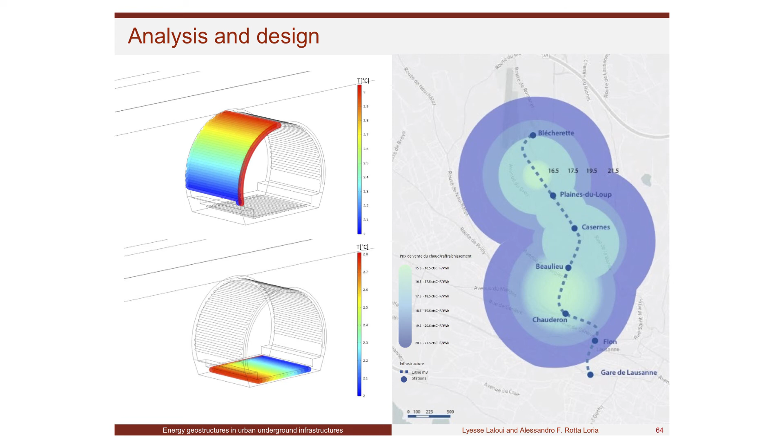And what I would like to show you is that in this analysis, we were able also to provide the cost of energy at which this energy could be sold depending on the distance from the metro line. So, for instance, if you are close to the metro line, the cost of energy would be around 16 cents per kilowatt hour. If you are a little bit farther, it's a little bit more expensive, and so on.

And this is also very important from an economical perspective to sell. It's not the same cost if you have to equip a construction that is just close to your metro line or if it's 500 meters from it.

And then also we calculate the amount of thermal power that we can get, the amount of CO2 saving, but this does not play a role, unfortunately, when we have civil engineering constructions, because at the beginning, when we vote for a project, we do not count the CO2.

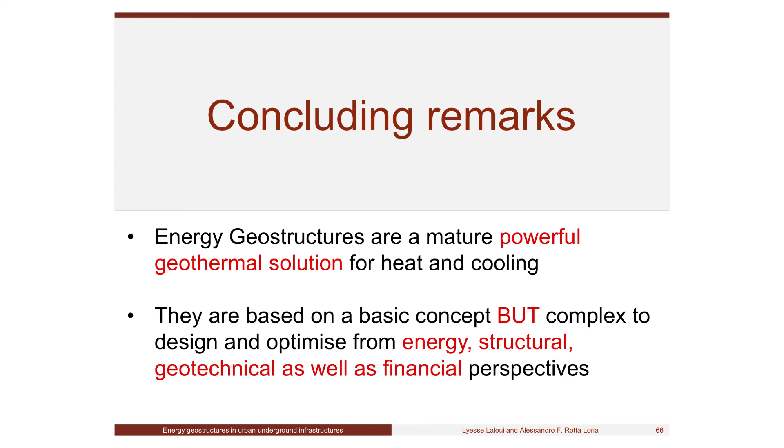And to conclude, I would like to say that energy geostructures, from my perspective, is a mature and even powerful geothermal solution that we should use in any case. And we should equip any infrastructure with those pipes, even if we are not using it today as energy geostructures. The concept is very basic, but if you would like really to have it seriously done, you have to design it properly and optimize it from energy, structural, geotechnical, and also financial perspective.